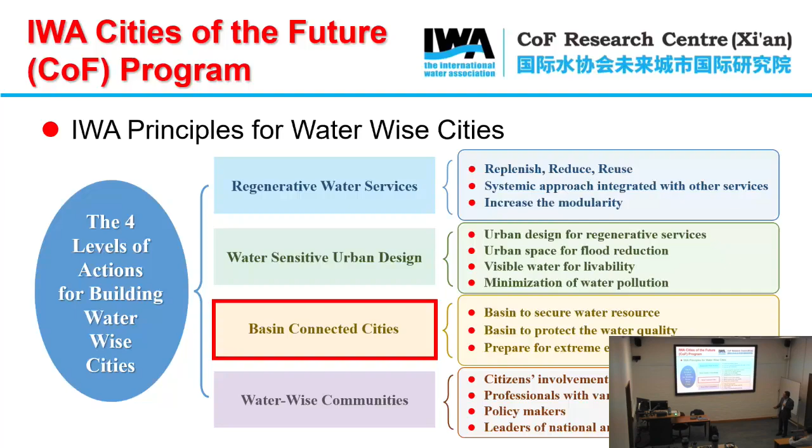Among these actions, what I like best was the idea of basin-connected cities. Because from the water basin, we try to get water to secure our resources. We need a basin to protect our water quality, and we need the basin to prepare for extreme events, especially flooding. That's a topic in many countries and areas, so I don't want to go through this in detail.

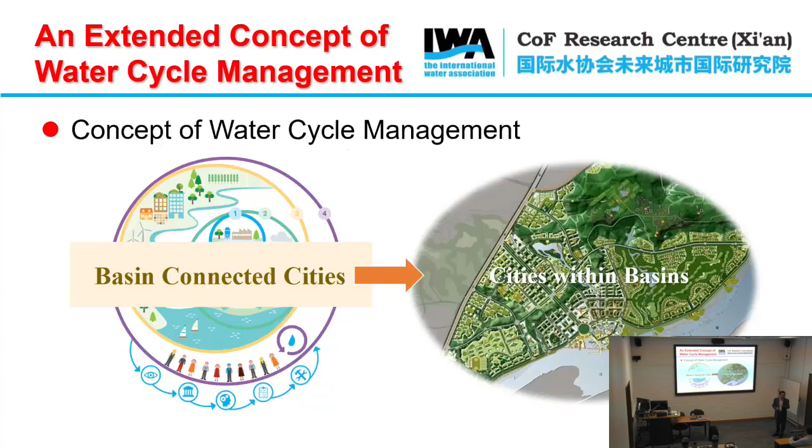In terms of basin-connected cities, which I like the best, I think our rationale is and should be: cities are within basins. That's the basic idea of our consideration.

As each city is within a basin, whether it's only the surface water basin or the underground water resources, they're related to one basin area. So we have to consider the water cycle, because whether for surface water or groundwater, all the water resources are within a basin. So you understand, for one basin there is always what we say a water cycle or hydrological cycle.

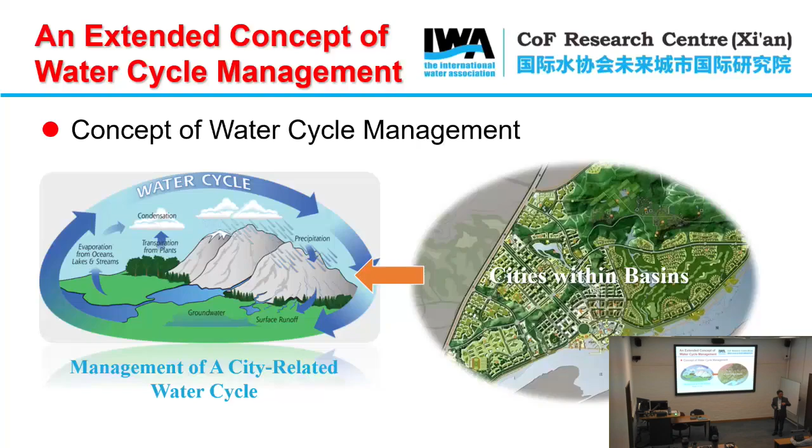That's very important. So I don't want to use time to explain our basic consideration in detail, but in principle, we think due to the natural water cycle or hydrological cycle, we get water resources everywhere in this world. So we have to consider what is the function of the natural water cycle.

From the viewpoint of systems, I want to point out the nature of the hydrological cycle is driven by solar energy. Even in ancient times, there was a water cycle, and for sure the only force utilized was solar energy, a natural resource. Second, such a system, if we try to analyze it, is always under a condition we call dynamic equilibrium.

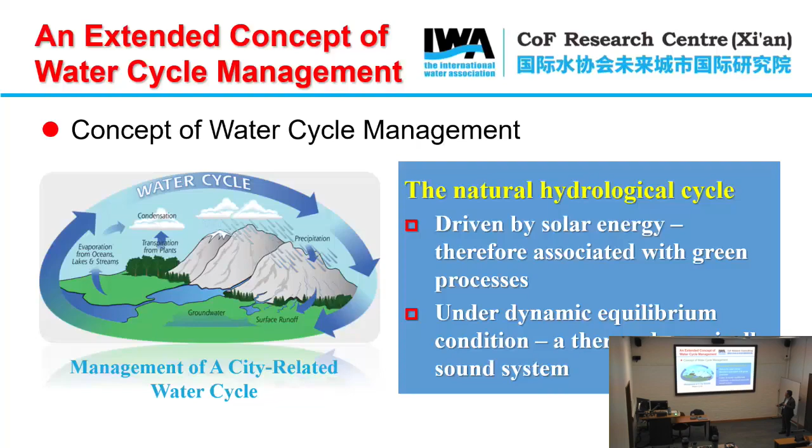That's also the essence for us to study a water cycle. So following this consideration, so many years ago, we tried to study and proposed an idea of water cycle management.

I can summarize the principles in 2 points. If we try to follow nature's example, what shall we do? I'd like to say 2 important points. Firstly, we should try to maintain the hydrological cycle as it is, as far as possible. You may have heard that China proposed building sponge cities. I always say the essence is to try to maintain the hydrological cycle as it is. That is the principle.

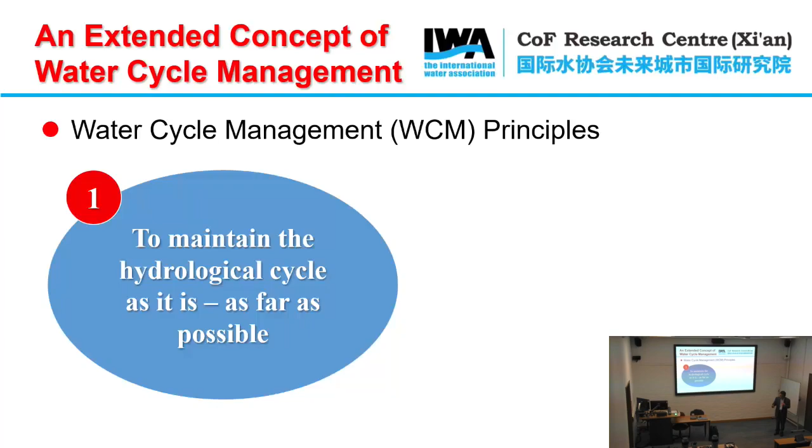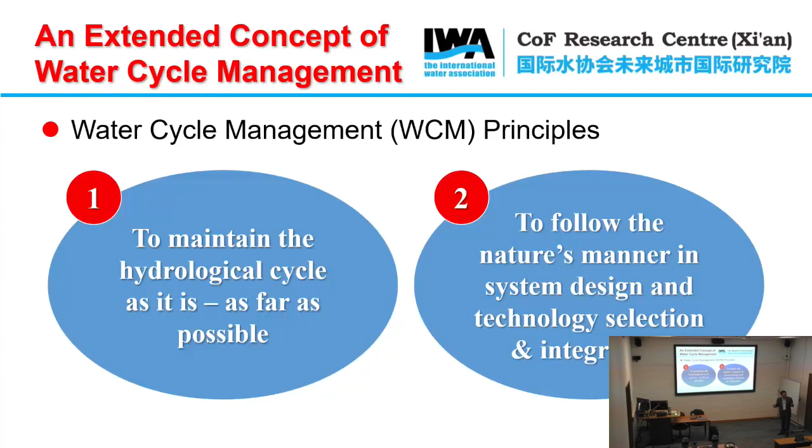The second one, of course, for us human beings, we have to do something by engineering. But I believe the principle is we should follow nature's manner in system design and technology selection and integration. So that's my basic consideration. I don't want to use a longer time to explain it, but I'll come back to one case study.

Actually, I remember in 2018, David and Wang visited Xi'an with a number of people from the UK. We held a seminar, and the topic was related to water management. At that time, I introduced our idea about water cycle management for urban water cycle. So here, I'd like to introduce this case.

That's an application of the principle of water cycle management in one city. I saw there are some people of Chinese faces here, so I believe you know the city of Xi'an - that's an ancient capital city. Historically, we say...

Xi'an was a water city, because what we say is 8 rivers surrounding the capital. Xi'an was a capital city from about 2,000 years ago, with plenty of water. You can see the numbers 1 through 8 - there were 8 water channels surrounding the capital city. So we say 8 rivers surrounding the capital.

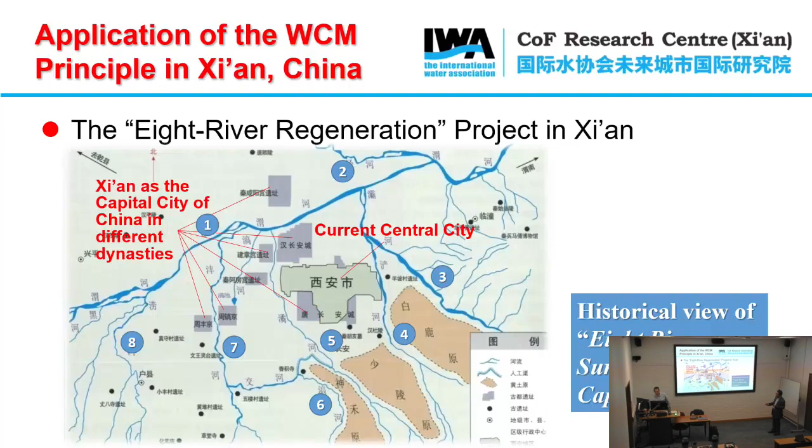So anyway, as in the whole world, in many places, we had water in ancient times, but now the water has disappeared or much decreased. So the historical beauty of a water city for our city of Xi'an disappeared, due to 3 reasons.

One is we always say climate change - actually I don't like to always complain about climate change. That may be one reason, but we cannot always blame the God. The second is increasing abstraction of water from rivers - that's happened frequently in different cities in China. And also unreasonable application of the river channel. So I believe there are 3 main reasons.

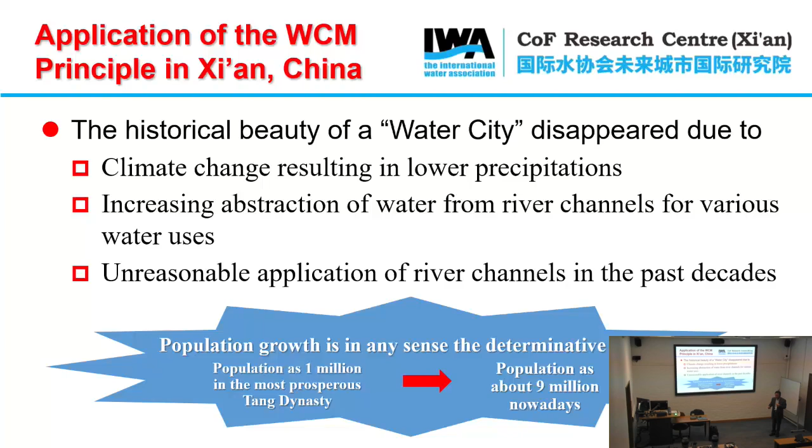Anyway, population increase may be the major reason. For example, when I talk about Xi'an, about 2,000 years ago the total population at peak time was about 1 million. People told me unbelievable, impossible, but that was true - for the ancient Xi'an city, 1 million. But nowadays, one saying is 9 million, maybe more, maybe 10 million. So that may be the main reason.

Therefore, from more than 10 years ago, the urban government, the municipality, decided to do one huge project - they call it 8 river regeneration. They decided to try to recover the ancient water beauty of that city. Of course, I have to say that's a huge task.

So there's a general plan of the project. You can see the urban area or municipality area of our city. Of course the central city is just over there, and we have many suburban districts. You can see each district belongs to a different basin of branch rivers.

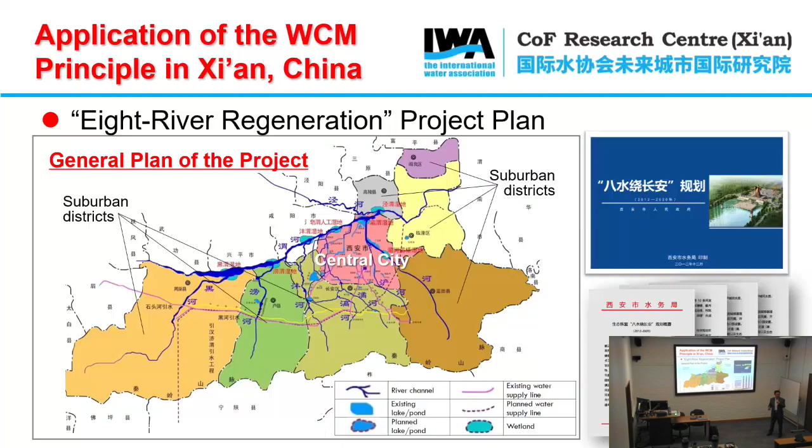Therefore, from the beginning of 2010, Xi'an decided to recover what we say the ancient beauty of the water city - in English we say the 8 river regeneration project. I will briefly introduce the general project plan. The first work is to rehabilitate 8 plus 2 river channels.

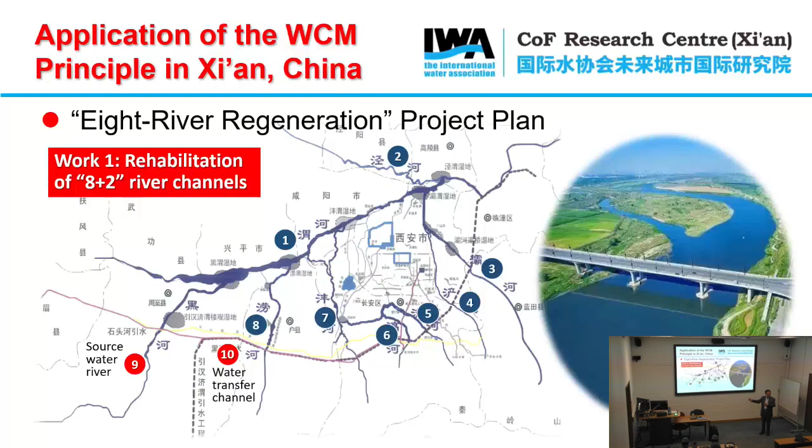From number 1 to number 8, those are ancient river water channels, but there are two others added to the water system. One is the source water for urban water supply to Xi'an city, but unfortunately that was not sufficient. So afterwards, they decided to build a water transfer channel from the southern part of the mountain to the north, for the provision of sufficient water sources to Xi'an as a large city.

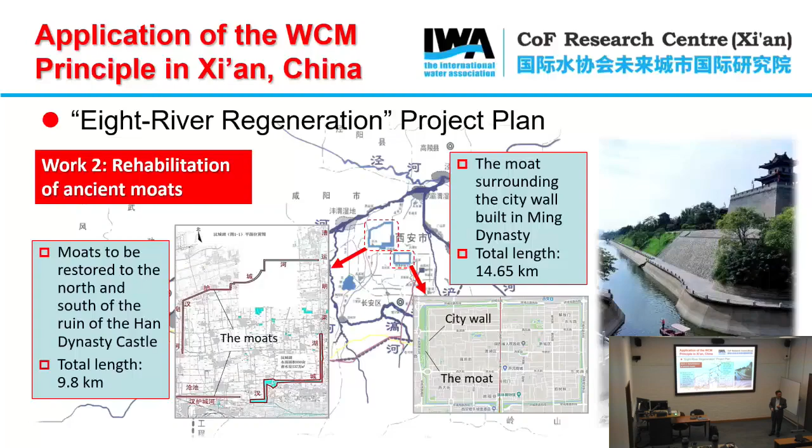The second part of the project is the rehabilitation of ancient moats. If you travel to China, you understand that for ancient Chinese cities, each castle was surrounded by a moat, for two purposes: to make the city more beautiful, and for the protection of the city. There are two moats here. One is very famous, surrounding the whole ancient city of Xi'an, and it's still there. Another one is restored from the north and south of the ancient ruin of the moat in the Han Dynasty. That one was not as perfect as this one, but also very important for the beauty of this city.

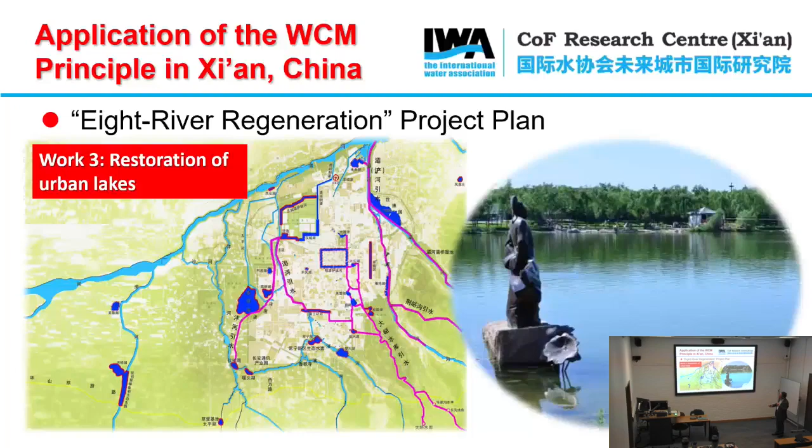Another part was to restore urban lakes. In ancient times, there were many lakes in this city. Of course, over a long period of time, the water disappeared, but we still have the site, the lower terrace to hold water. So the number three goal is to restore urban lakes.

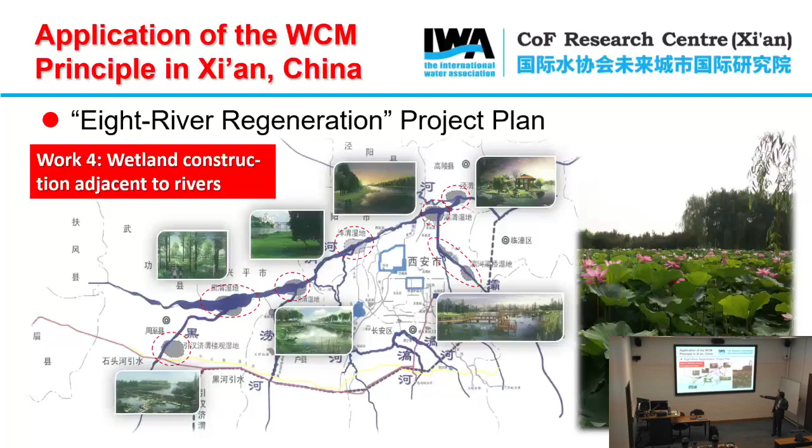Number four is wetland construction for all the areas adjacent to rivers. That's also very important. For example, in terms of the large wetlands we recovered, those are distributed surrounding the whole city.

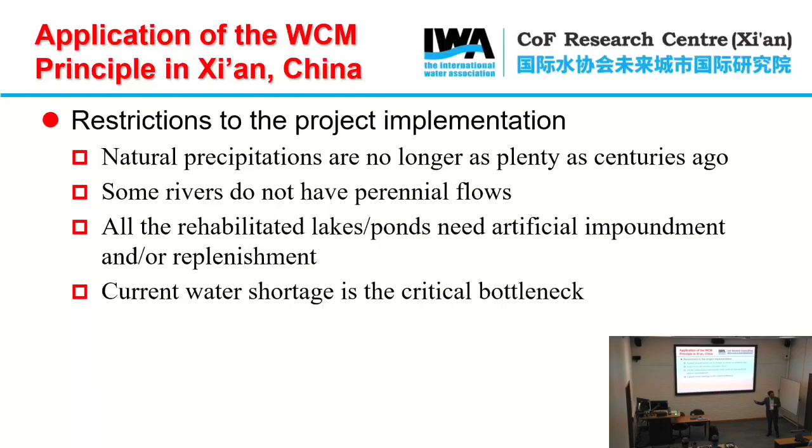From the beginning, our city faced the restriction of a shortage of water. In ancient times, all these lakes or rivers existed with plenty of water, but now, due to different reasons—of course we always complain about the weather—natural precipitation decreased, so there's no continuous flow in river channels, and the lakes and ponds disappeared. As a conclusion, the current water shortage is a critical bottleneck for this project.

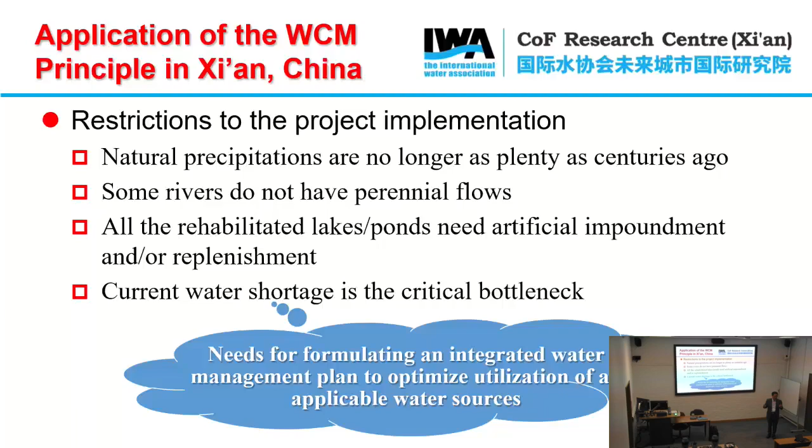Therefore there came the need for formulating an integrated water management plan to optimize utilization of all applicable water sources. Fortunately, about 20 years ago, I was appointed advisor for the municipal government, especially for water. So from the beginning, I was involved in many discussions, and even some planning for this project. Now I feel very comfortable about my small contribution to this project.

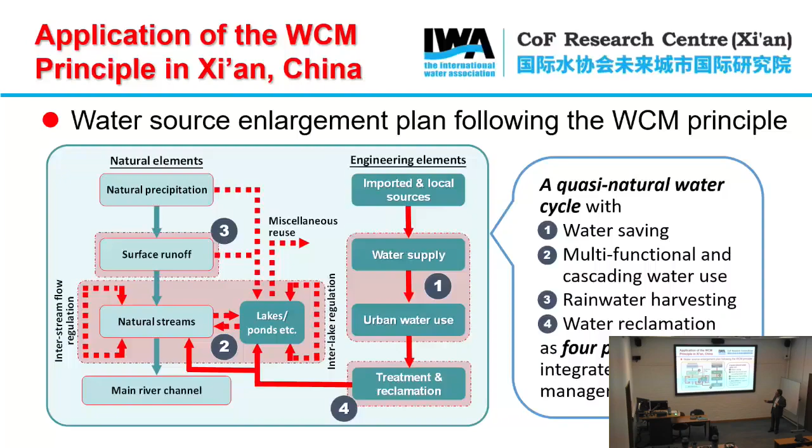So I call this a quasi-natural water cycle, including many measures. For example, water saving is always a topic for one city. Second, as water resources are limited for such a huge city with different water channels, ponds, and lakes, we have to consider multifunctional or cascading water use. Number three, rainwater harvesting is also very important, because we can have lakes and ponds that can store water. Number four, important, is water reclamation. I call these four pillars to support such an integrated water system and its management. That's my basic consideration.

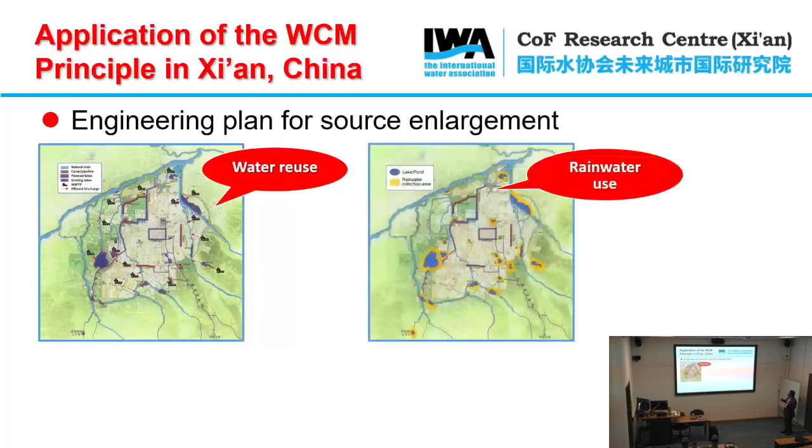Here I introduce a little bit about our engineering plan for source enlargement. One is water reuse. Actually, after I got my degree from Japan and went back to China, one job I did was mainly for wastewater treatment and reuse. So the first idea in my mind was water reuse. Second, rainwater use, to use rainwater as far as possible. Number three, stream flow regulation, meaning by building canals and pipelines we try to connect all these water bodies, including natural streams, into one system, to make the flow path longer. That's our idea.

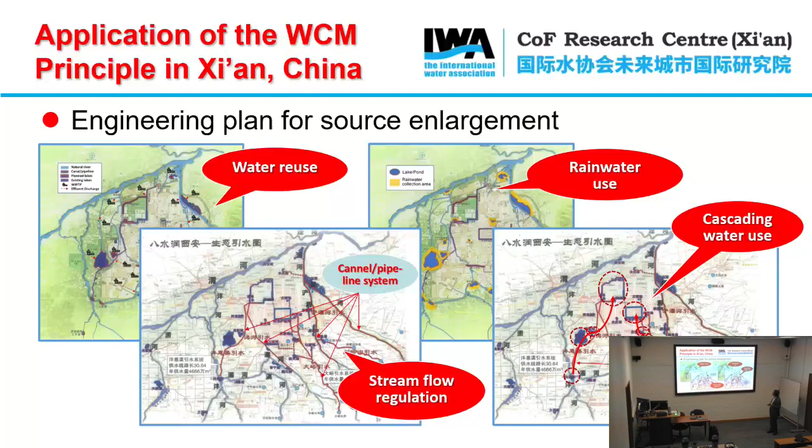Number four, cascading water use. Due to the geographic features of our city, we have water in the upstream and some water bodies in the downstream side. Therefore, we considered cascading water use. The objective is to supply sufficient water to sustain such a system.

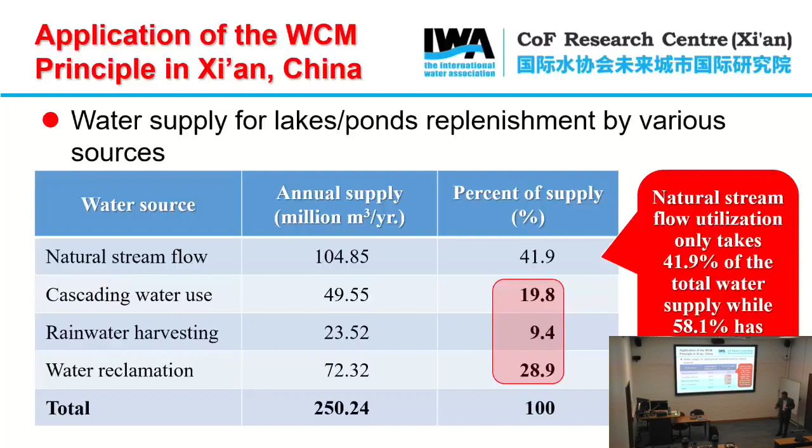This table shows a rough calculation of the available water, including supply and use—for example, natural stream flow, cascading water use, rainwater harvesting, and water reclamation into this system. Briefly, as shown here, as a result of such a plan, natural stream flow utilization can take about 42% of the total water supply. By other means, we can supply an additional 58% of water for such an urban water system.

My story is mainly this, because afterwards I have a video to show you the system more, with the video effect. Anyway, these years, by working with IWA in the Cities of the Future program, we did something.

In 2015, I published one paper and one book, Water Cycle Management. I believed that should be a new paradigm of wastewater reuse and safety control. Following the workshop, we worked together in Xi'an in 2018, and we published one book with Wang and myself as editors, titled Water-Wise Cities and Sustainable Water Systems. This book was published in 2021, and we gave examples from China, UK, and some other areas.

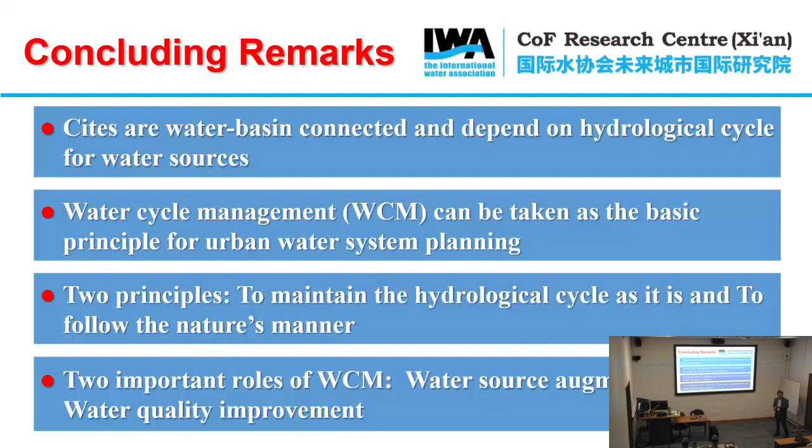And then we have a short video. Actually, this video was prepared at the request of IWA. They published it on the IWA website as an example of Cities of the Future.

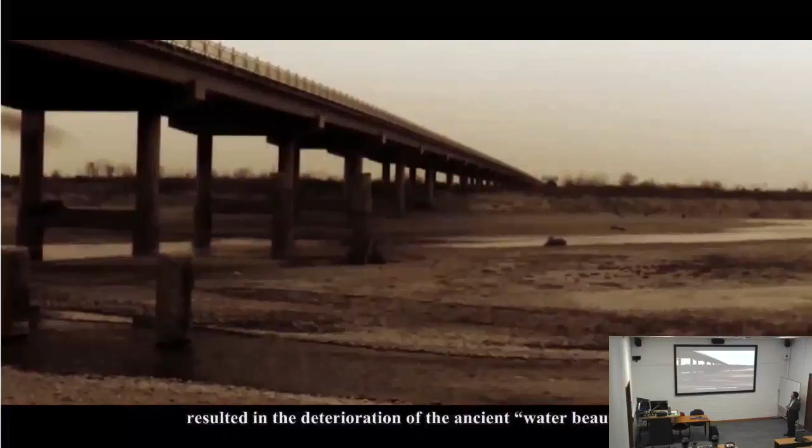In ancient times, Xi'an did not suffer from water shortages as it does nowadays. There was more than enough water running down the nearby Qinling Mountains to feed many rivers that flowed past the city, forming the ancient beauty of 8 rivers surrounding the capital. However, over the years, the combined effects of climate change, hydrogeological variability, rapid industrialization and urbanization, overutilization, and improper management of water resources resulted in the deterioration of the ancient water beauty to a great extent. Consequently, water environmental quality deterioration became a major hindrance to the sustainable development of the city.

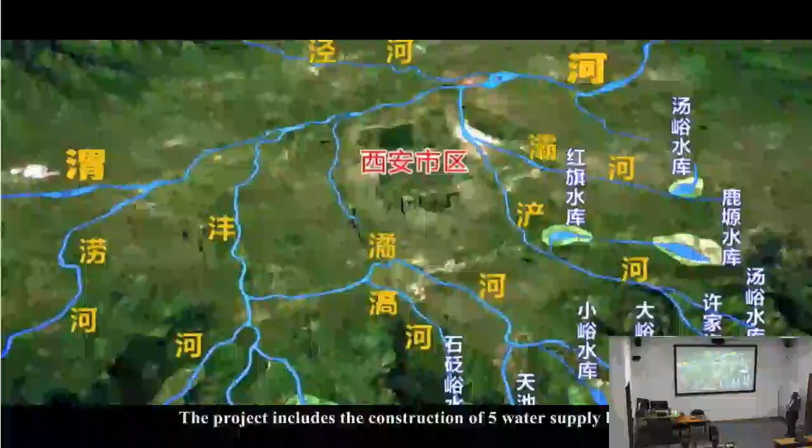Therefore, the Xi'an municipal government developed priorities to implement innovative solutions based on integrated urban water planning and management. The 8 Rivers Regeneration Project is a major investment to restore sustainable water management to the city. The project includes construction of 5 water supply lines, restoration of 7 wetlands, rehabilitation of 10 river channels, and reconstruction of 28 lakes, including waterfront parks designed to imitate Tang Dynasty landscapes known from ancient illustrations.

The construction work for this project follows an integrated plan that uses diverse sources of water, precipitation, streams, and reclaimed water to create a quasi-natural urban water cycle that provides both reliable water resources and attractive landscape for leisure activities.

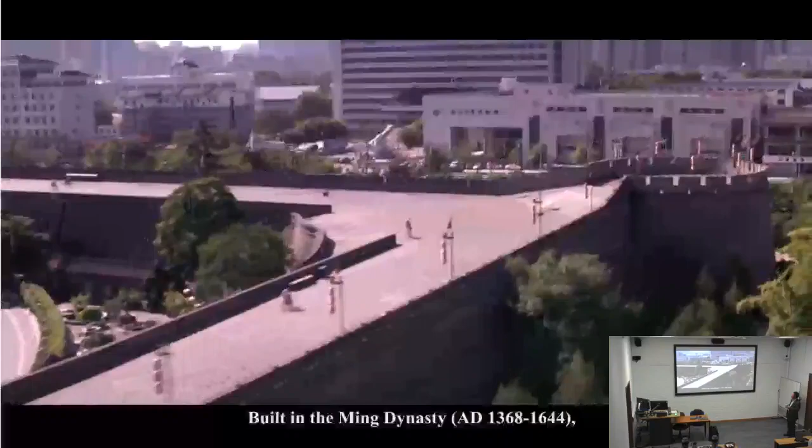The ancient city wall is one of the most famous attractions in Xi'an, built in the Ming Dynasty. The total circumference of the city wall is approximately 13.8 kilometers. The completely preserved city wall and its wide moat form a unique landscape. Furthermore, recent completion of rehabilitation works on the south gate of the city wall creates a unique scenery of a magnificent castle surrounded by clean water flows and a green belt.

By river dredging, stormwater regulation, point and non-point pollution control, sewage collection and treatment, water diversion and interconnection of different water bodies, all the dirty drainage ditches have been transformed into clean urban streams. Poetic water landscapes are thus provided to the whole city through a large-scale network of streams, city moats, lakes, and ponds. These are gifts from the 8 Rivers Regeneration Project to residents.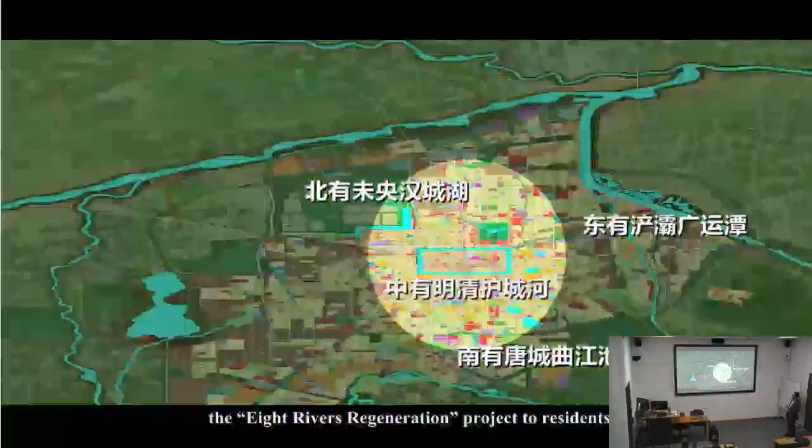Restoration of aquatic ecology is also an important element of the project. About 11 kilometers east of the city, a national wetland park has been built to provide a suburban leisure site by in-situ restoration of abandoned pits in the river estuary area. Similar restoration has also been implemented in other suburban areas.

Together with river channel rehabilitation, flood dike reinforcement, and lakes or ponds reconstruction, these have gradually made the...

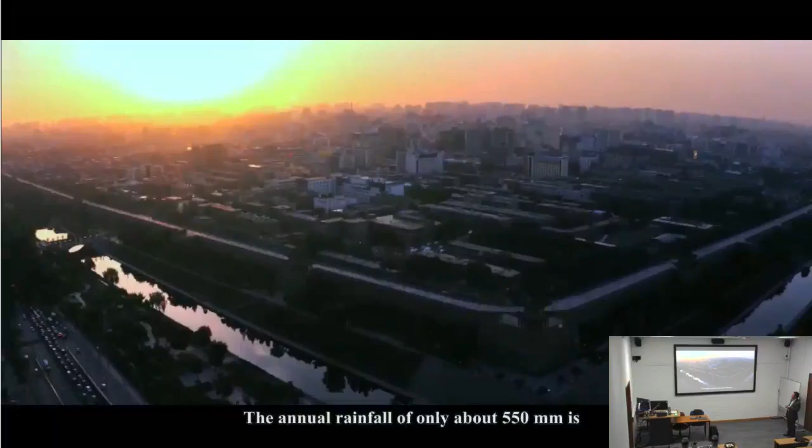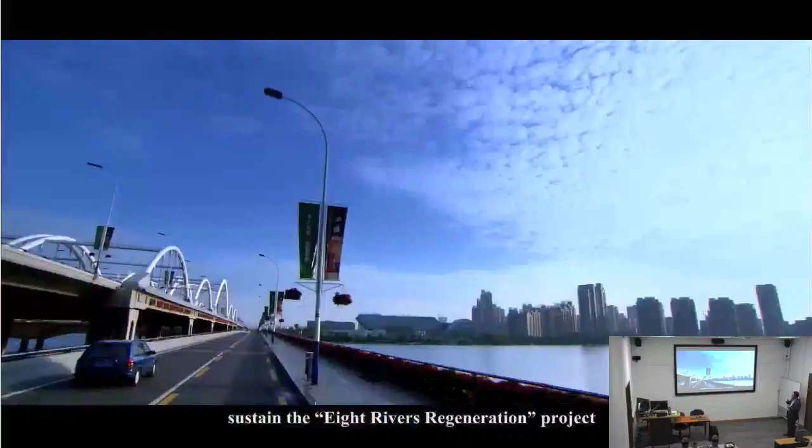...regeneration project a critical bottleneck. The Qinling Mountain Range in the south of Xi'an forms the dividing line between the Yellow River and Yangtze River Basin, as well as the city's back garden, providing major source waters for urban water supply.

For efficient water use, to meet project requirements, an integrated water management plan was developed following the principle of water cycle management. Water saving, multifunctional and cascading water use, rainwater harvesting, and water reclamation form the 4 pillars of the integrated water management scheme. Managing all stages of the water cycle provided a means to improve the health of water bodies and associated ecosystems, which underpins the city's livability.

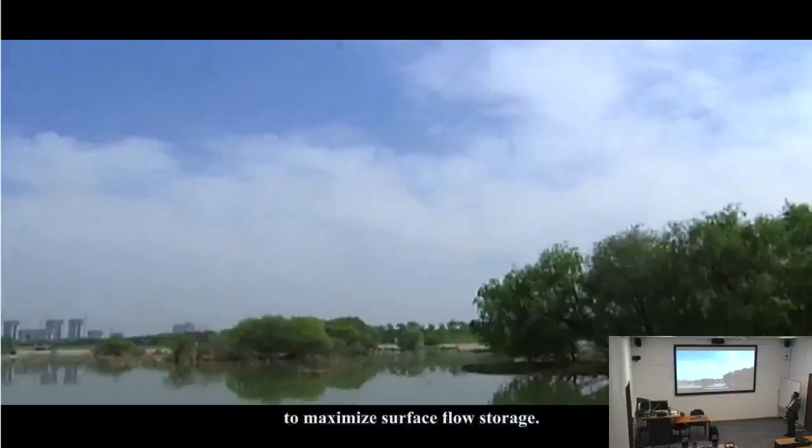For source enlargement, a number of ecological reservoirs have been constructed to maximize surface flow storage. Also, many rubber dams were built on rivers to provide temporary flood storage areas. These measures increased the urban water supply capacity by 178 million cubic meters per year.

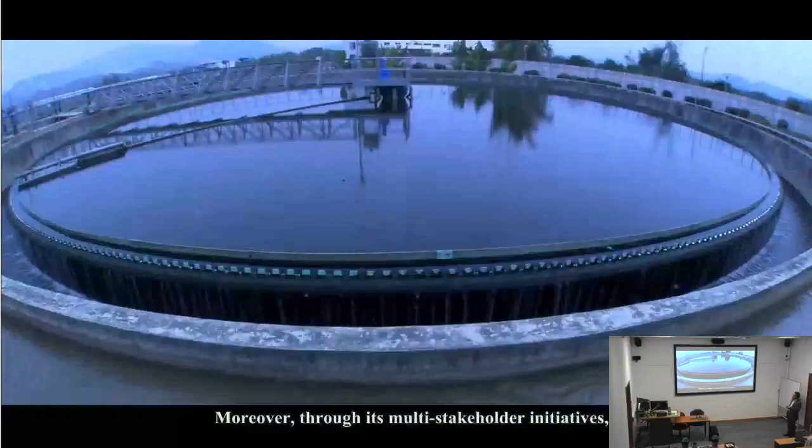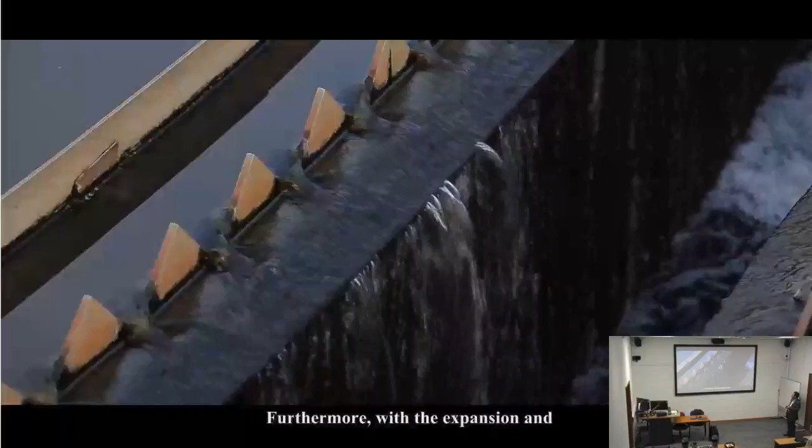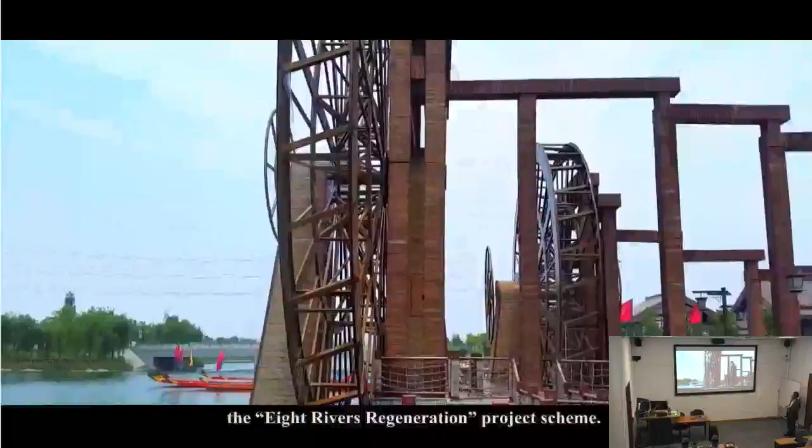Moreover, through multi-stakeholder initiatives, the adoption rate of water-saving technologies has grown exponentially to over 70%, reducing agricultural and domestic water demands considerably. Furthermore, with the expansion and upgrading of urban wastewater treatment facilities, the quality of reclaimed water now meets the standard for supplying water to replenish lakes and ponds within the 8 Rivers Regeneration Project scheme.

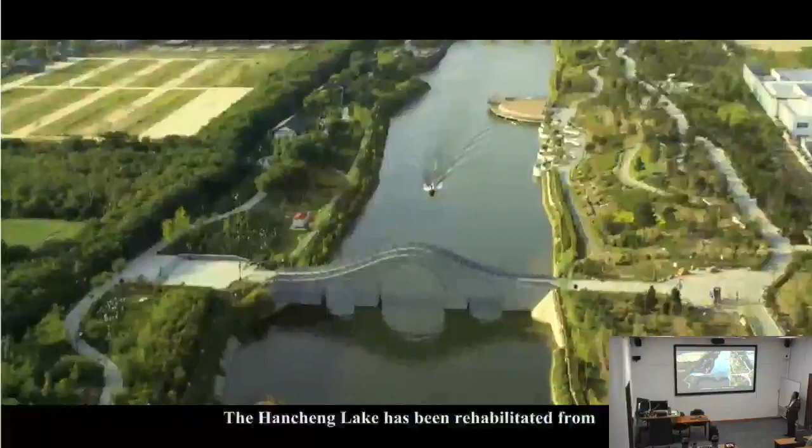Integrated water management in Xi'an is also combined with water pollution control. The Hancheng Lake has been rehabilitated from a section of the ancient moat, which for many years was a dirty drainage ditch that received urban sewage discharges and was filled with garbage and withered weeds, breeding mosquitoes and flies, and emitting offensive odors. By open and common channels, fresh surface water and reclaimed water are fed to Hancheng Lake.

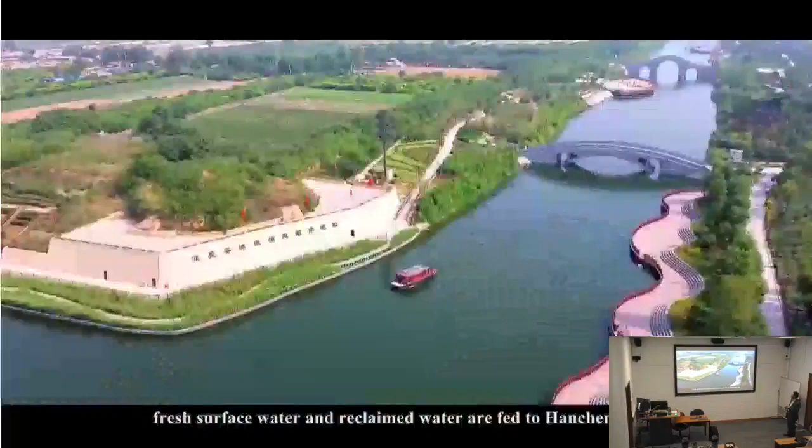As a result of sediment dredging, lake rehabilitation, and water replenishment, the former dirty water has been transformed into a beautiful water landscape in a central urban area.

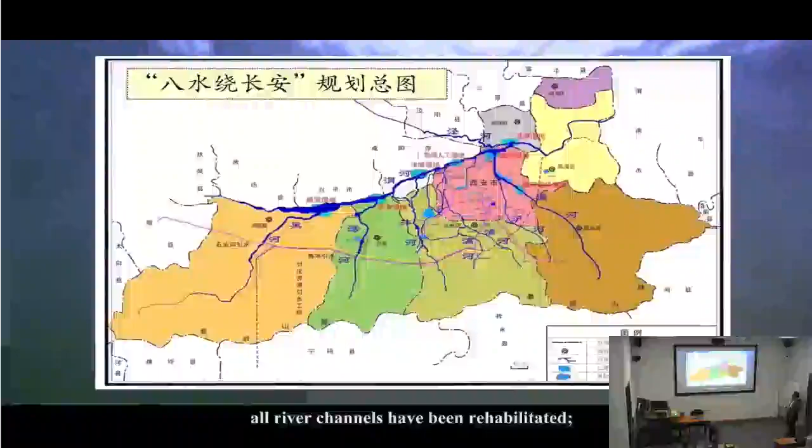The current status of the 8 Rivers Regeneration Project indicates the following: all river channels have been rehabilitated, restoration of lakes, ponds, and wetlands has been completed, the water surface area has increased by 448 hectares, and the wetland area has been enlarged by 900 hectares.

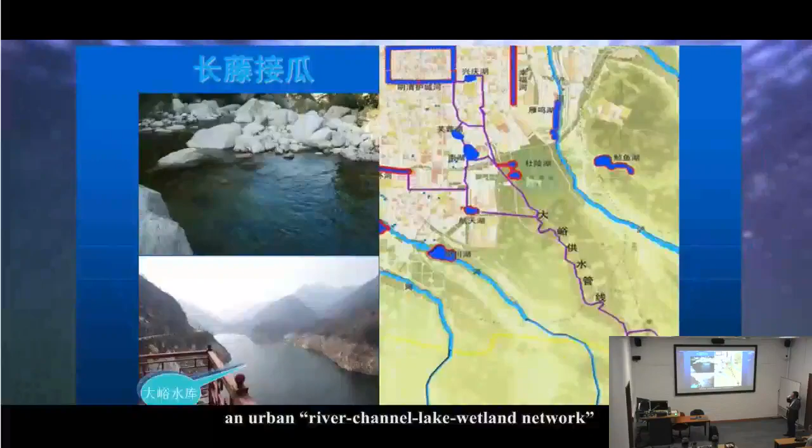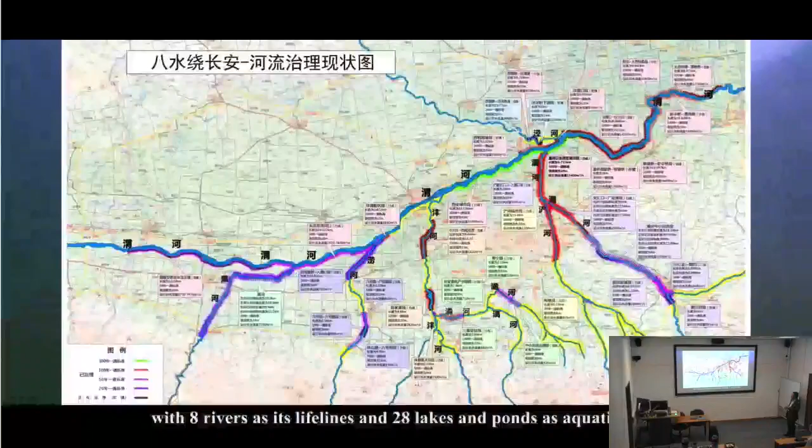An urban river channel lake wetland network has been formulated in Xi'an. These achievements altogether show a newly rehabilitated ancient city with 8 rivers as its lifelines and 28 lakes and ponds as aquatic nodes, all surrounding the central city and radiating to the suburban areas to display the charm of a water ecological landscape along with the cultural and historical monuments.

Water is getting closer and closer to people in Xi'an and adds lush greenness to their daily lives. It is a pleasure to see these beautiful modern water landscapes. With different tastes from southern China, I will come here more frequently.

How large is the water surface here? It gives people a new place of pleasure. Xi'an is amazing. I have traveled to many places, but this park is for sure the best one.

We get more and more water. These parks improve our lives. The scenery is getting better. I love the waters in Xi'an.

The 8 Rivers Regeneration Project has progressed ahead of schedule and already achieved its set goals.

The water area in Xi'an has reached 50 square kilometers, equivalent to about one-tenth of the current urban area. Therefore, Xi'an is not only featured by its rich historical and cultural remains, but also its new appearance as a water city with rich water elements, a livable city with a beautiful water environment, and a more active city with great potential for sustainable development.